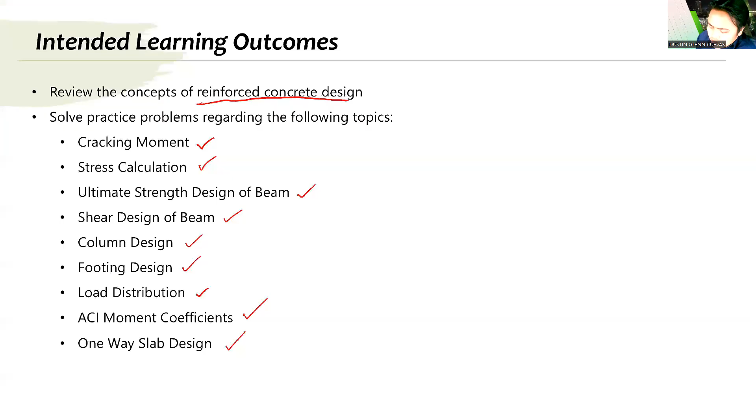Okay, so since this is just a review, let me go straight to ultimate strength design. This is what we reviewed last time. Anyway, I'm going to upload this lecture for those of you who are asking.

For ultimate strength design, basically, as I've said, this is just a summary of my lecture. So for ultimate strength design, we are now considering the maximum strength of our materials. That means in order for us to have safety, to have allowance, we can't just use the maximum of the materials. At the same time, you are not giving off any safety factors.

So our safety factor is actually coming from what we call load factors. The load factors are what give the safety. Load factors are actually our safety factor. We need safety because we are now maximizing the material when it comes to ultimate strength design. You maximize the strength of the material.

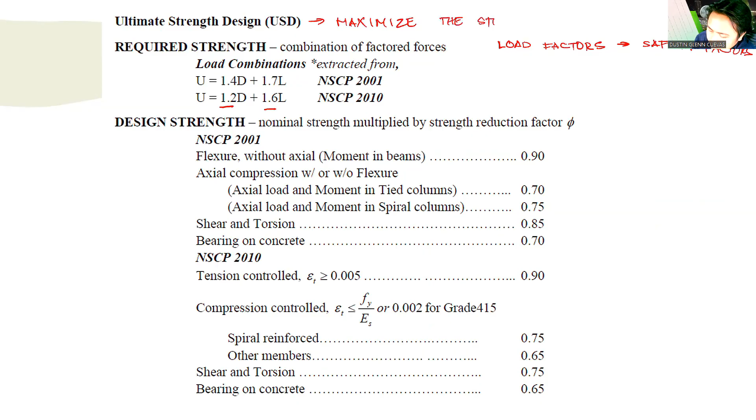So the common load factors that we use are actually 1.2 of dead load plus 1.6 of live load. That is for NSCP 2010. And for NSCP 2001, that is 1.4 of dead load plus 1.7 of live load.

You might be wondering, sir, why are you still teaching the 2001 code? Isn't that outdated? That is because our board examiner, Engineer Praxedis Marquez, started being the examiner for structural design since 2001, when that NSCP was being used. The question bank used by Ma'am Praxi, our examiner in structural design, has all her questions coming from 2001 going to 2010. So some questions can still only be answered using 2001. That is why in review center, we mention both codes, 2001 and 2010.

Anyway, if you know the concept, you don't have to worry about these codes. For 2001 NSCP, our load factor is actually 1.4 dead plus 1.7 live. For 2010 NSCP, it's actually 1.2 dead plus 1.6 live.

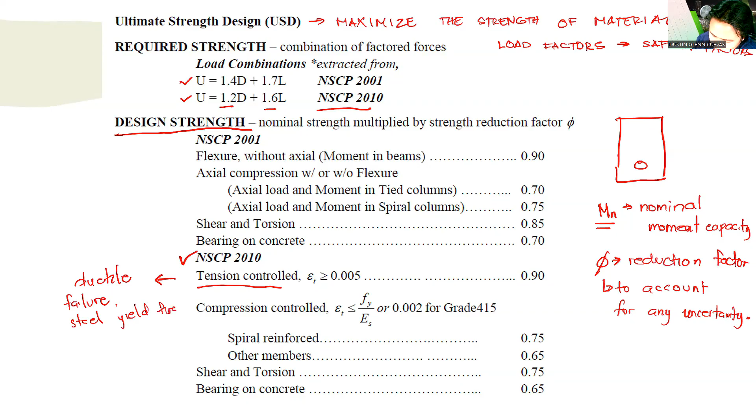So what is tension controlled? Basically, these are sections that are actually prone to ductile failure. So when we say tension controlled, these are sections which will exhibit ductile failure. When we say ductile, it means that the steel will yield. Steel yields first before concrete fails. So that's ductile failure, meaning steel yields first before concrete.

Steel yields first before concrete. So in NSCP 2010, we say that our section is tension controlled when the tension strain ET is greater than 0.005. If the tension strain is greater than 0.005, that is tension controlled. And tension controlled is actually what we want in our design, because we want the steel to yield, we want ductile failure. So our reduction factor, you can notice, is very close to 1, that is only 0.9.

On the other hand, when we have compression controlled, this is actually for brittle failure. So compression controlled, from the word itself, are sections that are commonly exposed to compression, for example our columns. In a column, the compression strain reaches 0.003 earlier compared to the steel reaching yield, because there is axial load involved.

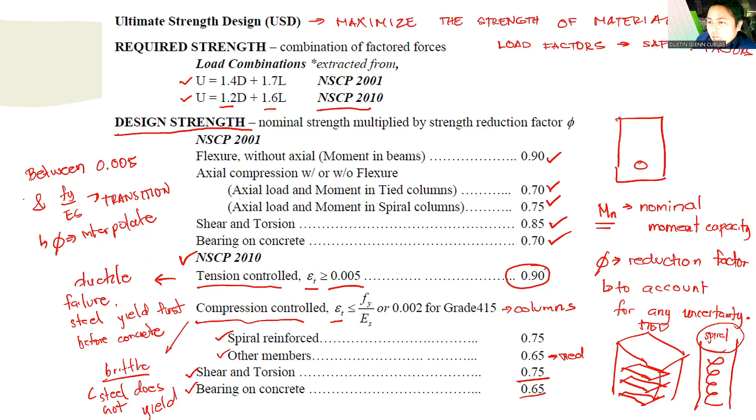Okay, so how do we calculate for the flexure formula? As I mentioned, we are going to use the maximum strength of our material. So if we have this compression, this is the compression, and basically the bottom part is actually in tension. We are experiencing positive moment, so compression and tension.

The bottom part of the reinforced concrete, yung bottom part na to, this one, basically it's already cracked na po yan, so it will not be included in the calculation. Crack na yung ilalim. And then you have tension being carried by the bottom or by the tension bars, so that is Fy, the stress is Fy.

And the stress in your concrete is highly nonlinear. Nonlinear po yung stress in concrete. This is nonlinear because concrete is a nonlinear material. So in order to make the calculation easier, we transform the nonlinear stress into its equivalent stress block. This is your equivalent stress block.

The equivalent stress block is actually 0.85 of Fc prime. So instead of using yung nonlinear na Fc prime, ang ginawa po natin, ginawa natin siyang equivalent stress block. Ginawa natin siyang rectangular lang, but we cannot use Fc prime kasi in-average lang po natin to eh, in order to get the equivalent rectangular block. So in-average natin yan, so we are only going to use 0.85 Fc prime. This is what we call the Whitney's stress block.

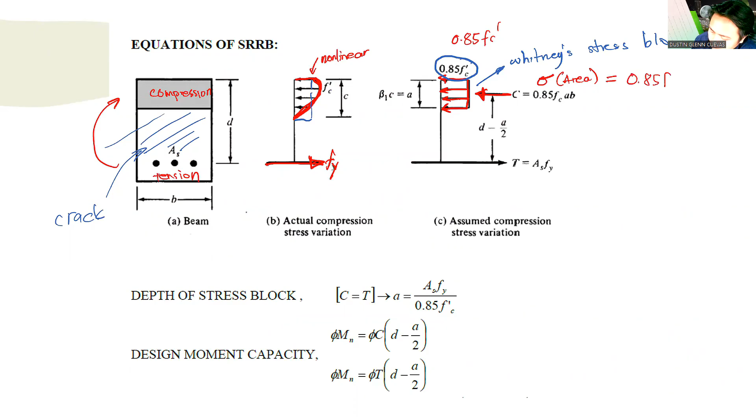So basically, if the stress is 0.85 Fc prime, and if you want to calculate for the compression force, it is stress times area. So based on our mechanics of materials, that is just stress multiplied by area, no? So the stress is basically equal to 0.85 Fc prime. The area is the area of the stress block - the area right here is A multiplied by B, AB.

This is B. The tension stress or the tension force is basically, again, the stress multiplied by area. The tension force is AS multiplied by Fy, given that Fy actually yields, kapag po nag-yield sa Fy. If hindi nag-yield, then we have to calculate the value of Fs.

So, in order to calculate for the depth of the stress block A, kailangan po natin calculate yung depth ng stress block A. The depth of the stress block A, we just have to equate compression is equal to tension. So equating compression is equal to tension, compression equals tension: 0.85 Fc prime AB is equal to the tension force, which is ASFY. You can now calculate for A - that is simple, let's just arrange the equation: A equals ASFY over 0.85 of Fc prime B.

So, and then in order to calculate for the moment capacity, since this is actually two forces that are equal to each other, and going opposite in direction, the other one is going compression, the other is going tension - two forces that are equal but opposite in direction, they are what we call a couple.

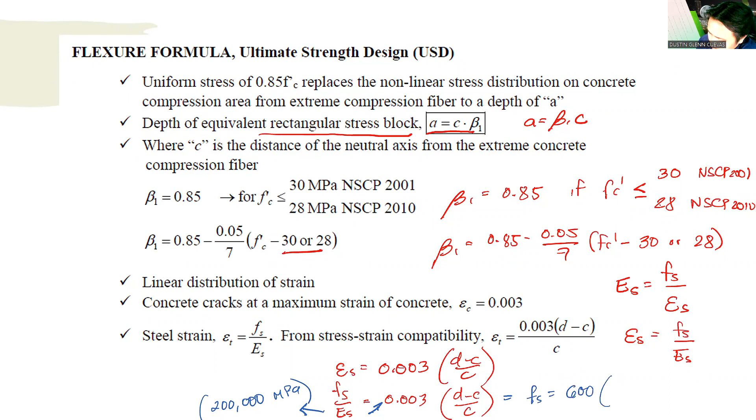You just have to cross multiply. So 200,000 multiplied by 0.003, it will just be Fs is equal to 600 multiplied by D minus C over C. Okay? So that is how you calculate for the stress in steel if you want to check kung nag-yield ba yung bakal mo o hindi.

Okay, if Fs is greater than Fy, that means your steel yields. If Fs is less than Fy, then not yield. Not yield, use Fs. Gagamitin po natin si Fs sa calculation.

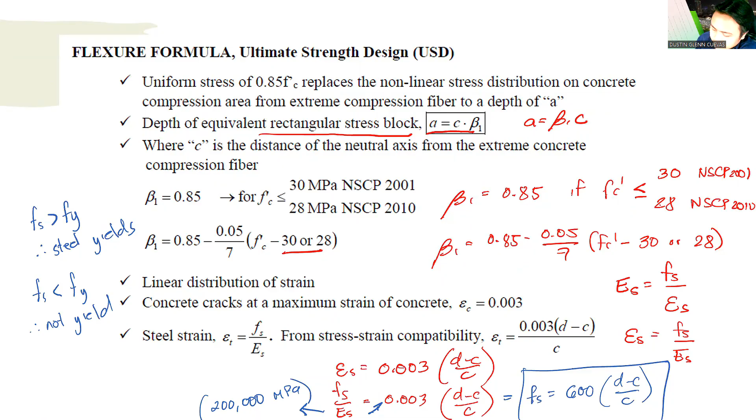So you don't have to remember any formula here, no? Because if you try to memorize the formula, one way or the other, makakalimutan mo rin siya, no? So try to remember compression is equal to tension. The compression is stress multiplied by area, and the stress is 0.85 FC prime. The area is A multiplied by B, and that will be equal to As Fy.

AS is the area, the stress is Fy. And then if you want to calculate for the capacity, that will just be the force multiplied by the distance. And the force is compression or tension, you can choose - either compression or tension, multiplied by the distance, which is D minus A over 2.

Then you have to multiply with the reduction factor to calculate for the ultimate capacity. In design offices, I would like to mention this because when I remember it from the board exam, it's actually quite helpful. In design offices, when you are creating a spreadsheet to calculate for the area of steel, usually what we are doing is to calculate the steel ratio.

So let's introduce again. There's actually what we call the steel ratio. Steel ratio is the ratio of the steel over the effective area of concrete. So steel ratio is rho, which is equal to AS divided by BD. So if I want to solve for AS, it is equal to rho BD. Rho is our steel ratio.

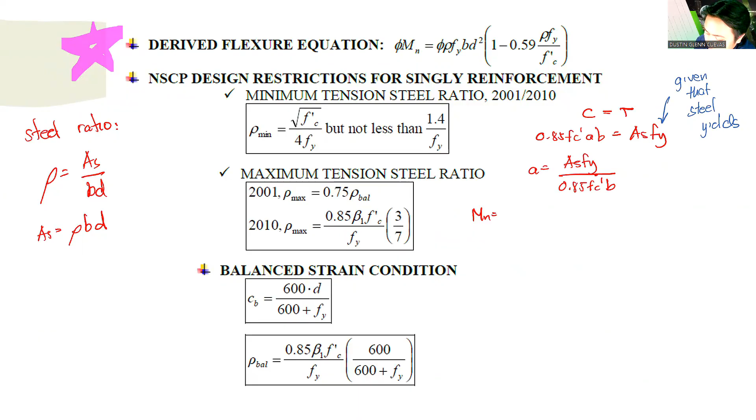Based on our formula of Mn, Mn is equal to compression or tension multiplied by D minus A over 2. And if I want to use compression, that is 0.85 of FC prime AB, D minus A over 2. Substituting this value of A to this equation, Mn will now be equal to 0.85 of FC prime, the A is ASFY over 0.85 FC prime B.

But let me do some changes here. Before I substitute, I will multiply this by D over D such that AS over B times D becomes equal to rho. So it will be equal to rho FYD divided by 0.85 of FC prime. That is my A - rho FYD divided by 0.85 of FC prime.

So that is what I will substitute to this equation. Substituting, that will be rho FYD divided by 0.85 of FC prime B multiplied by D minus rho FYD divided by 0.85 of FC prime. Take note, multiply by 2 because we have A over 2.

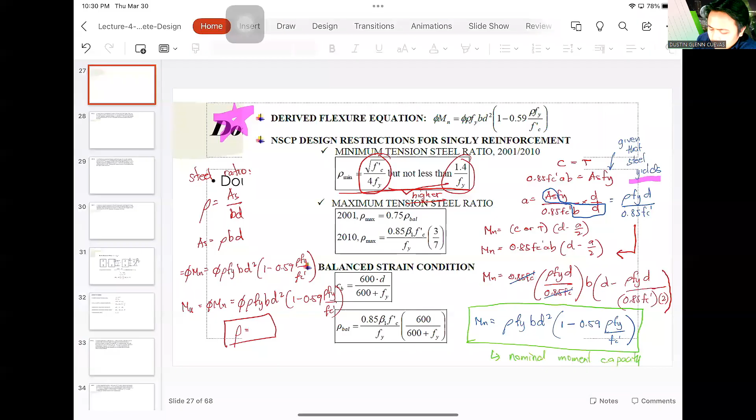multiply by 3 over 7. So what is that 3 over 7? Ano po yung 3 over 7 na yun? So according to NSCP 2010, I'm talking about NSCP 2010,

the minimum strain such that your beam will be considered flexural beam. According po ito sa NSCP 2010, no? According sa kanya, the minimum strain, ES na lang, ES minimum, the minimum strain is actually 0.004. The minimum strain in order for your beam to be considered as flexure dominated, or ibig sabihin po flexure yung failure niya na may moment. The minimum strain is 0.004. So strain po yan in terms of strain.

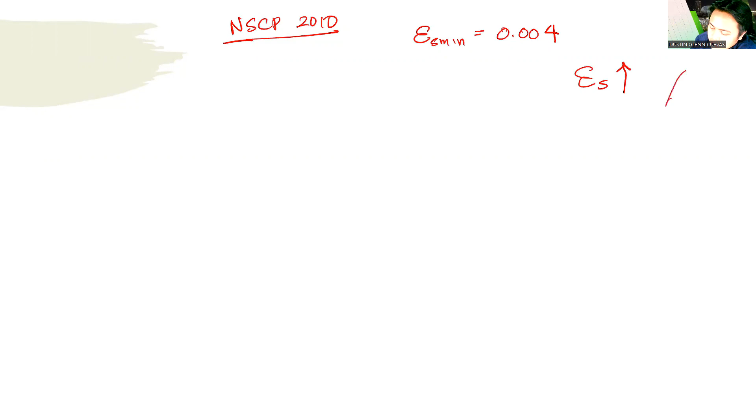However, as your strain increases, ang nangyayari po kapag lumalaki si strain, si rho bumababa. Si steel ratio, it's actually decreases. When the strain increases, the steel ratio decreases. And on the other hand, when the strain decreases, the rho increases. So they are actually inversely proportional.

Inversely proportional. So ang katumbas po ni minimum, dahil inversely sila, for minimum steel ratio, ang katapat niya po is actually the maximum steel ratio, rho max. Ang rho max daw natin, the maximum steel ratio is when the strain is 0.004. So when the strain is 0.004, this is the strain 0.004. The strain in concrete is given as 0.003.

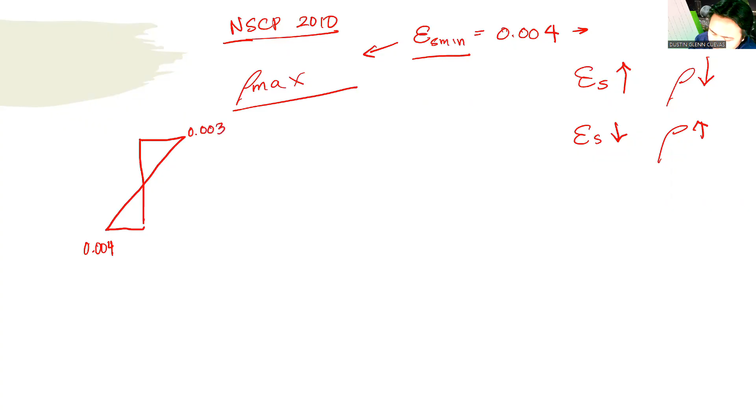So this is actually C, and this is D. So if I want to do ratio and proportion ulit ako, this is triangle 1, and this is triangle 2. So such that this one will be 0.004 plus 0.003, that is 0.007. So triangle 1 muna ako, that will be 0.003 divided by C is equal to triangle 2, which is 0.007 divided by D. So the ratio of C over D

is equal to 3 over 7, 0.003 divided by 0.007, or basically your C is equal to 3 over 7 of D, 3 over 7 of D. And if I want to relate that to A, pwede ko na ma-relate yan dun sa A.

C is equal to T. So C is 0.85 of FC prime, AB is equal to ASFY. And AS is equal to rho, or basically rho is equal to AS over BD.

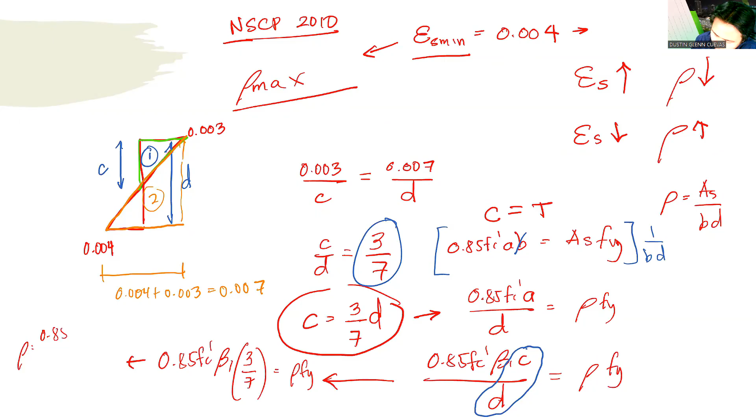So if I want to solve for rho, ang rho natin is equal to 0.85 FC prime beta 1 divided by Fy multiplied by 3/7. So ito yung maximum natin, no? That is our maximum steel ratio: 0.85 FC prime beta 1 over Fy multiplied by 3/7. So this is actually the maximum steel ratio for NSCP 2010.

Yan talaga yung sinabi ng Code. The strain is supposed to be 0.004 for your section to be considered as flexure dominated, no? Flexure dominated.

On the other hand, meron po tayong tinatawag na rho 5. Ano yung rho 5? So rho 5 is basically another amount of steel ratio. Ito pong rho 5, nagsasabi sa atin that if you use this amount of steel ratio, your beam will surely be tension controlled, no?

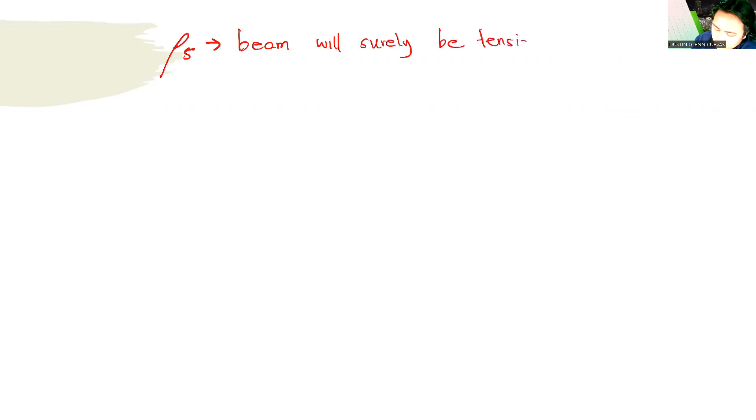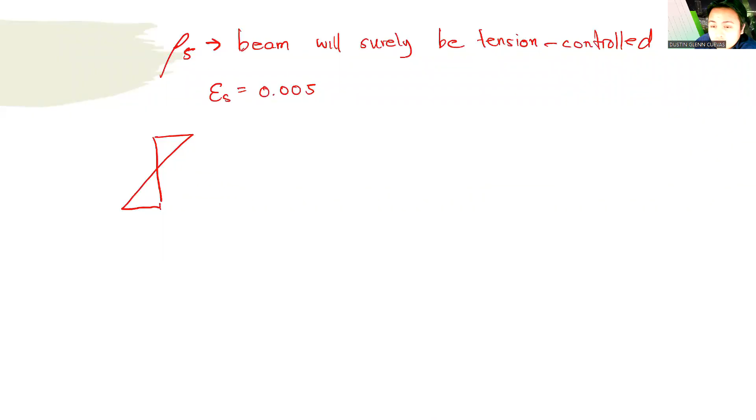Tension controlled. And according to what we read earlier, di ba sabi natin kapag tension controlled, the strain is actually equal to 0.005. So kapag yung strain natin 0.005, if we create again the strain diagram, this is 0.005, this is 0.003, so this is again C, this is D. So if I use the ratio and proportion, 0.003 over C is equal to 0.003 plus 0.005 divided by D.

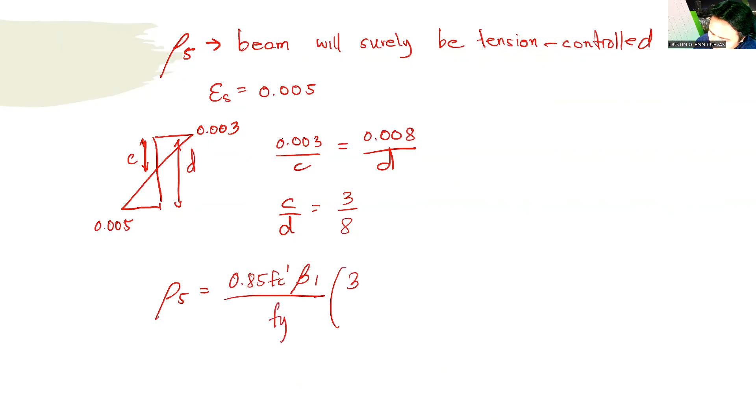So ang C over D natin will be 3/8, no? So substituting again to this equation, ang magiging equation natin for rho 5 is 0.85 FC prime beta 1 over Fy multiplied by 3/8. Take note, this steel ratio is actually for tension controlled condition. This is not the maximum steel ratio as given by the code. Ang maximum pa rin naman is 3/7.

However, for 3/8, that is for the amount of reinforcement given that your reinforcement will surely be tension controlled, no? This is actually the maximum amount of reinforcement given that your section will surely be tension controlled.

So kung sigurado kang tension controlled, ano yung phi factor? 0.9. The phi factor will be 0.9. Kasi kapag tension controlled, phi is 0.9. So again, the 3/8 is the maximum amount of reinforcement given that your section will surely be tension controlled, whereas the phi factor is 0.9.

Sir, bakit ba meron pang rho 5, meron pang rho max? In this case kasi, when we talk about rho max, even though the code mentioned that it is 0.004, ito pong 0.004, di ba less than 0.005 yan? Less than, so is this tension control? Yung maximum, tension control kaya to? Hindi, di ba? So this is not tension control.

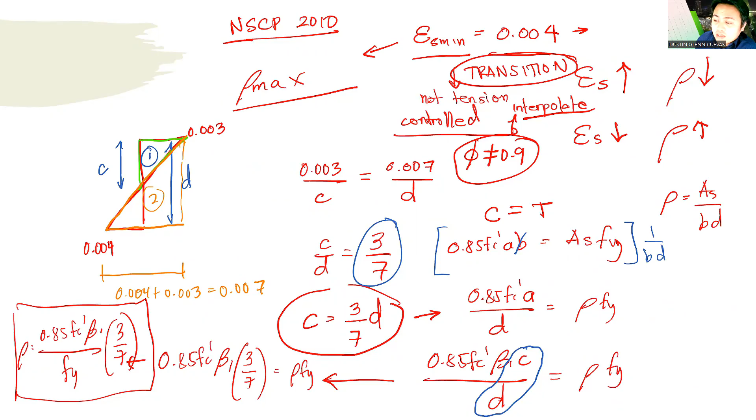Meron pa po tayong tinatawag na balance condition. Ano ibig sabihin ng balance condition? So aside from the maximum, meron kang rho 5, which is the steel ratio when your beam will surely be tension controlled, basically phi is 0.9. Meron pa po tayong tinatawag na rho balance. So rho balance is when the steel and concrete yield at the same time.

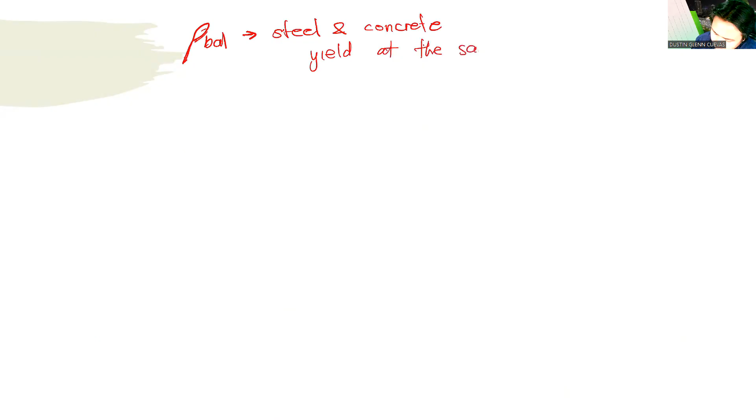So actually, this condition rarely happens - almost never does steel and concrete yield at the same time. Most of the time, according to our discussion last time, we prefer that steel yields first, because when steel yields, that is actually a ductile failure. So we want ductile failure.

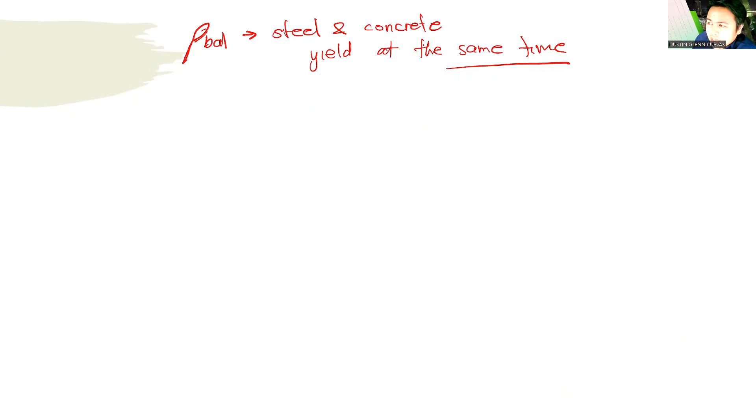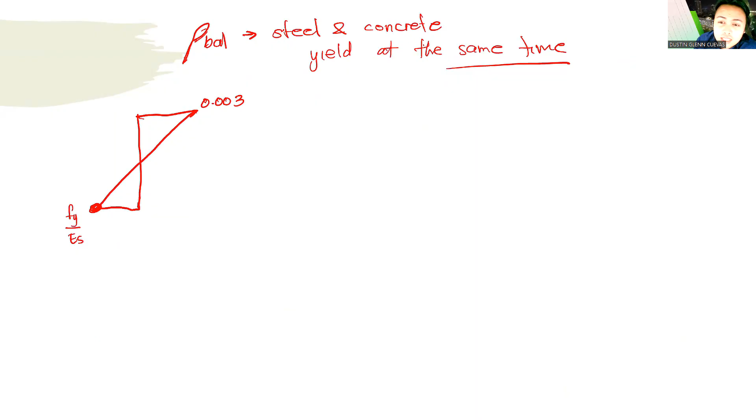Going back here, basically the balance is when the steel and concrete yield at the same time. So if we make our strain diagram linear, when it reaches 0.003, the steel yields, and this is actually equal to Fy over Es. Fy over Es - they yield at the same time. This is C, this is D.

So you can do a ratio: 0.003 divided by C is equal to Fy over Es divided by D minus C.

We could now substitute this to our equation earlier. The equation we have is 0.85 Fc prime beta 1 C over D is equal to rho Fy. So I want to calculate the ratio of C over D.

So to make it easier, let's consider the second triangle, just like earlier. This is triangle 2. So that will be 0.003 divided by C is equal to 0.003 plus Fy over Es, divided by D. So calculating for C over D.

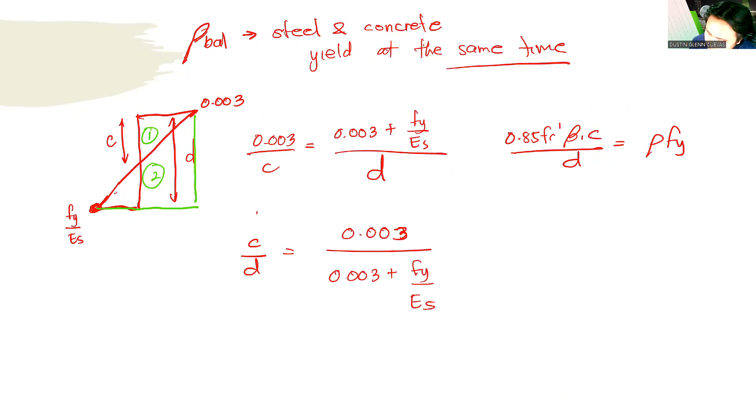Cross multiply: that will be 0.003 divided by 0.003 plus Fy over Es. And Es is given as 200,000 megapascal. So multiply by 200,000: C over D is equal to 200,000 times 0.003, that is 600, plus Fy, over 200,000. Simplify, that is C over D is equal to 600 over 600 plus Fy.

So substituting that to this equation, the rho, or the rho balance, is equal to 0.85 Fc prime beta 1 over Fy multiplied by 600 over 600 plus Fy. You could try to remember this formula - it's only applicable for balance. That is what we call the balance steel ratio, when the steel and concrete yield at the same time.

Again, you have to remember three rho values. First one, maximum, when the strain is 0.004, the factor is 3 over 7. Second one, when the beam is surely in tension, that is when the strain is 0.005, the factor is 3 over 8. Third one, balance, when the steel and concrete yield at the same time, the factor is 600 over 600 plus Fy.

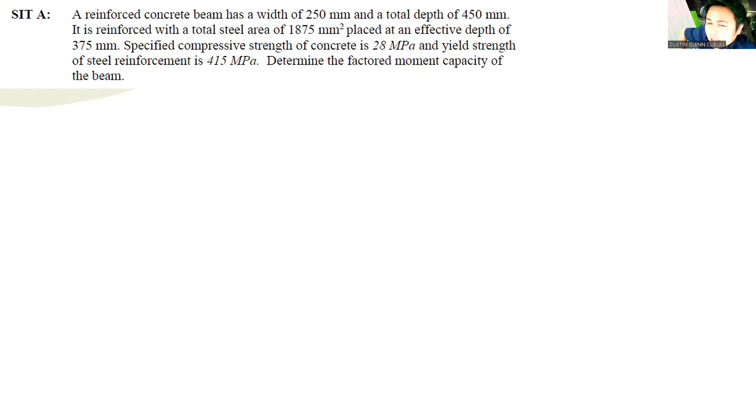You need to listen from the start. You need to absorb the concept so that you won't forget all the formulas. Even I can derive it all the time - I'm able to derive it all the time.

So let's calculate this one. A reinforced concrete beam has a width of 250 millimeters and a total depth of 450.

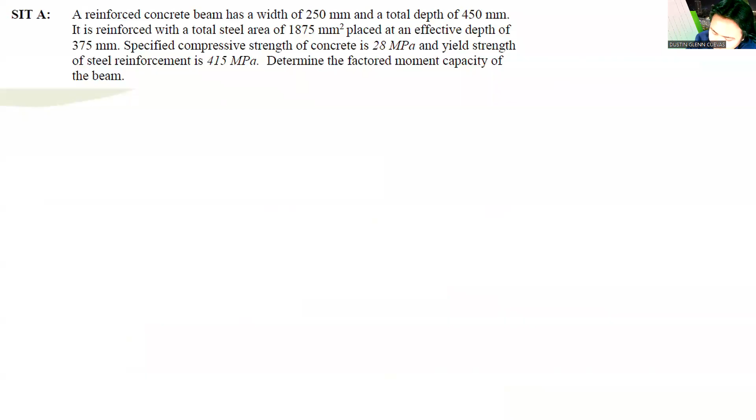So the width is 250 and the total depth is 450. It is reinforced with a total steel area of 1875 millimeters squared, placed at an effective depth of 375. Specified compressive strength Fc prime is 28 megapascal, and Fy is 415 megapascal. Determine the factored moment capacity of the beam.

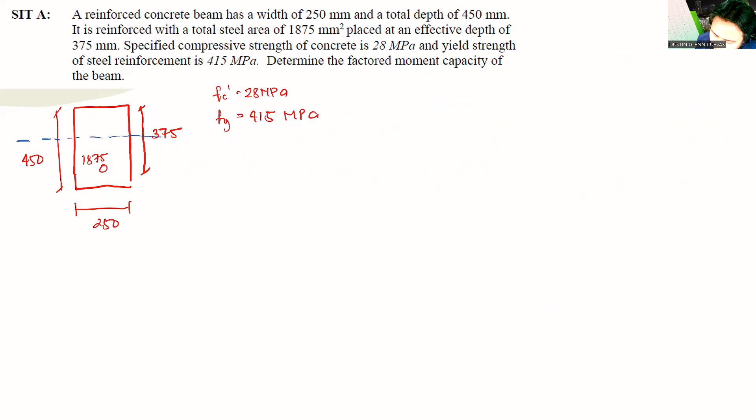What will happen is the beam will crack, and then you will have a rectangular stress block. The rectangular stress block is 0.85 Fc prime stress, and then you have the tension side.

So you just have to equate compression equal to tension. The compression is stress multiplied by area. Stress is 0.85 Fc prime, and your area is A multiplied by B. That is equal to As Fy, assuming steel yields. I'm assuming first that steel yields; later on, we will check.

So calculating for the value of A: 0.85 times Fc prime times A times B, that is 250, is equal to As, that is 1875, multiplied by Fy, 415. The value of A will be 130.78.

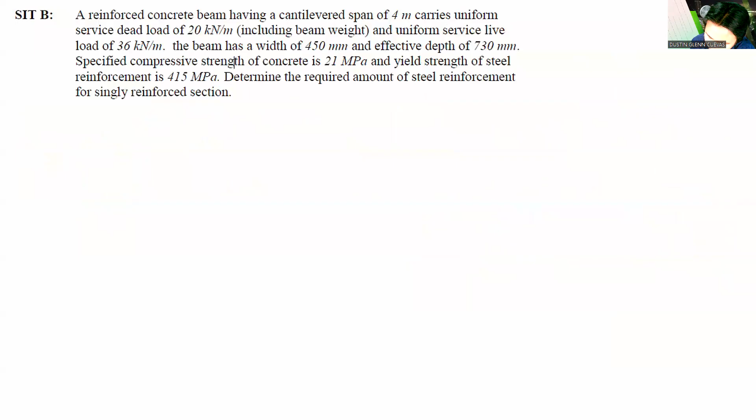Since steel yields, to calculate for the nominal moment capacity Mn, Mn is equal to compression or tension multiplied by D minus A over 2 - force times distance. I'll use tension since I know steel yields, so As Fy multiplied by D minus A over 2. That equals 1875 multiplied by Fy, 415, multiplied by D, effective depth 375, minus A, 130.78, over 2.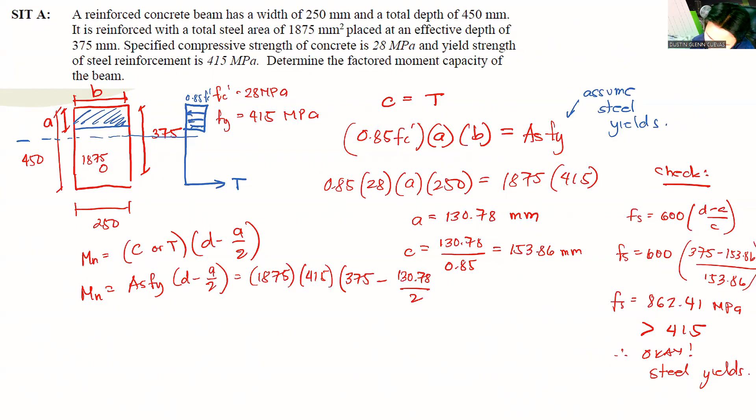So Mn is now equal to 240.92. Divided by 1,000 to make it kilonewton meter - for those watching the recording, in case you're confused, this was divided by 1 times 10 raised to 6, since we're in newton millimeter, divided by 10 raised to 6.

So to calculate for the factored moment, take note the question asks for factored - phi Mn. Our phi factor or reduction factor is actually dependent on the strain. So if you calculate for the strain Es, the strain is 0.003 times D minus C over C.

So this is easy to calculate: 0.003 times, that is 375 minus 153.86, over 153.86. The strain will surely be less than 0.005, correct? What is the strain? 0.003 multiplied by D minus C, that is 375 minus 153.86.

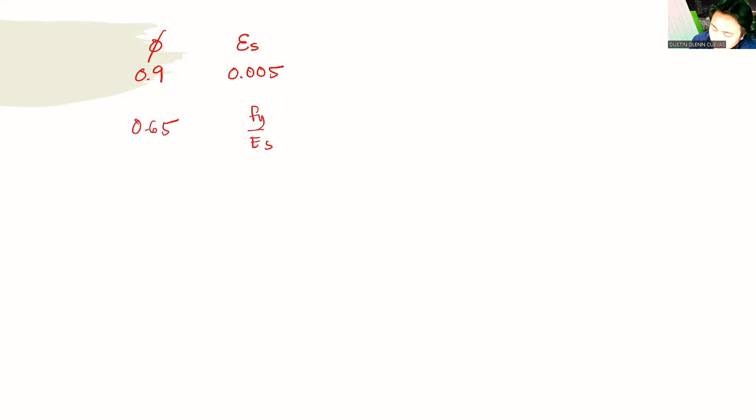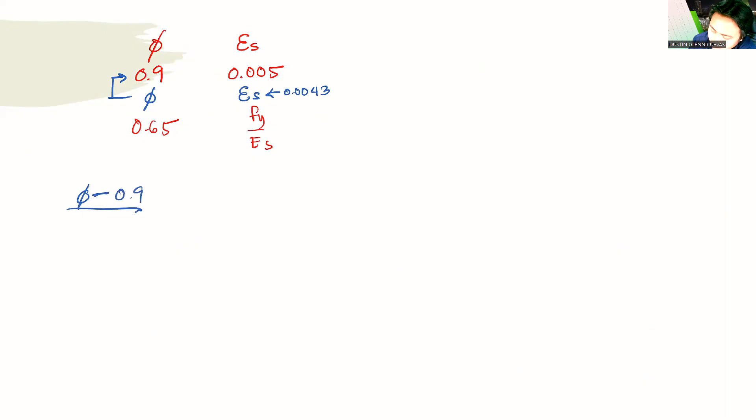So given that your strain is 0.0043 - that's the blue value here - you have to calculate for the phi factor. You can use your calculator for linear interpolation. Let's interpolate first before using the calculator: phi minus 0.9 divided by, equals 0.65 minus 0.9.

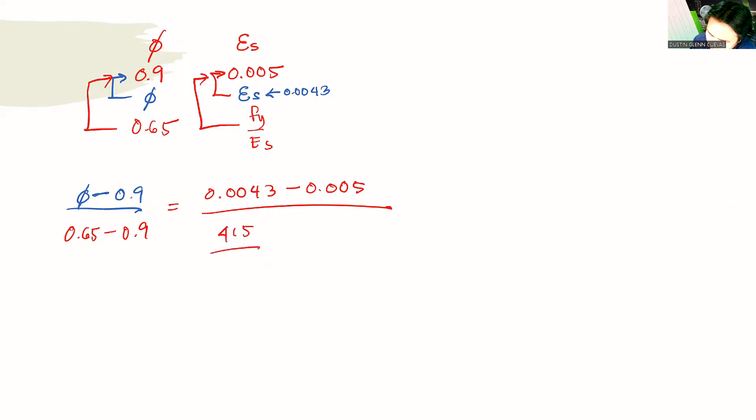That is equal to this one, 0.0043. 0.0043 minus 0.005 divided by Fy over Es. So Fy is 415. 415 over 200,000 minus 0.005. So all of this, the only unknown here is the phi factor. You can easily calculate for the phi factor. 415 over 200,000 minus 0.005. What is the phi factor?

0.84. So other formulas, this is actually the first solution, solution 1. Solution 2, you can use the formula given in the code, which is basically coming from interpolation itself, just from interpolation.

The phi factor is equal to 0.9 minus 0.65. Let me derive this. Okay, it will be 0.65. So the formula in the code is actually 0.65 plus 0.25, that will be strain S minus strain Y over 0.005 minus strain Y.

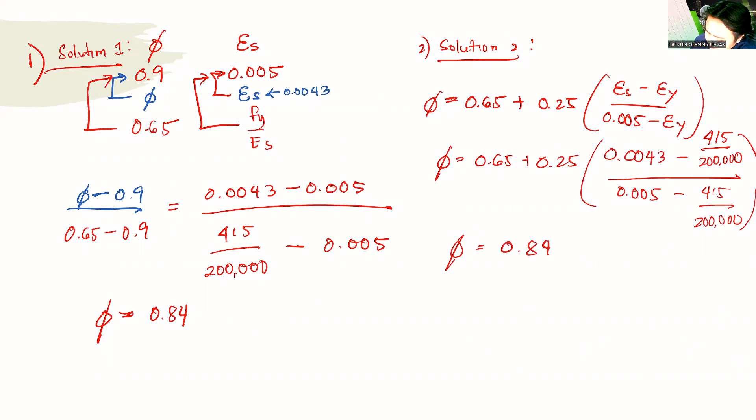0.84 again, of course, since it's coming from the same interpolation. 0.84 still because it just comes from interpolation. Basically, sometimes I forget that formula. Actually, right now I forgot it too because I don't want to memorize it. What I'm doing is just a simple interpolation. So you can also use your calculator if you want, since I'm also teaching calculator use. So solution 3, that will be using the calculator.

What we'll do on the calculator is mode 5.2 - mode, sorry, mode stat, mode 3.2. Can you see my calculator? Okay. So mode 3.2 first. Since this is just linear interpolation, at 0.9 my strain is 0.005.

At 0.65, my strain is Fy over Es. My Fy is basically 415 divided by 200,000. So 200,000. So I have 0.9 equal to 0.005, then 0.65 equals Fy over Es, 0.002075. So press AC. Again, please remember, what I put in X is actually the phi.

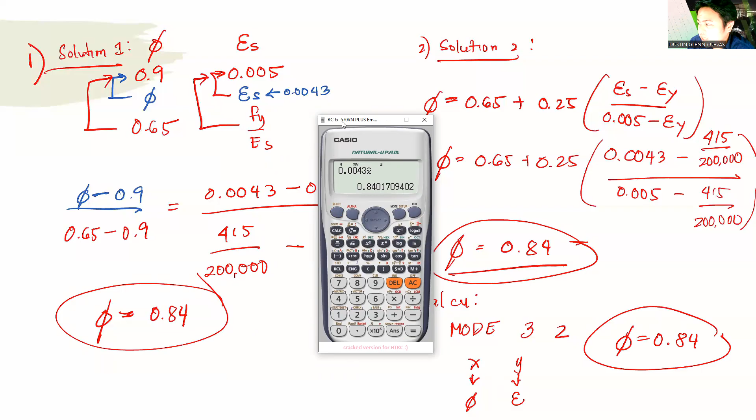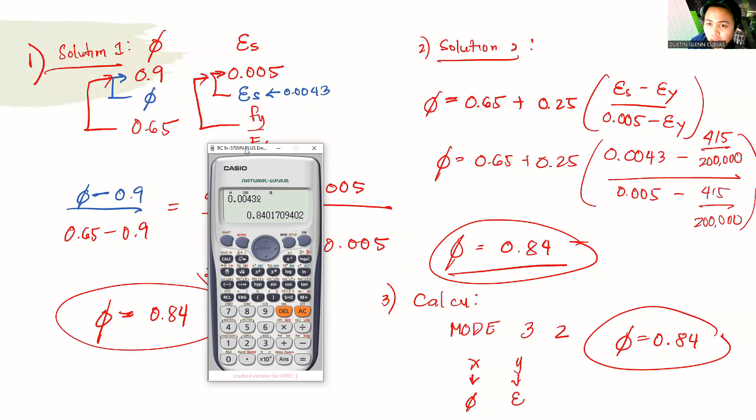So you have 3 solutions. If you forget any one of these, you can choose whichever you want to use. It could be the simple interpolation, it could be the solution coming from the code, or it could be the calculator. All will yield the same number - they're all the same.

So now that our phi factor is 0.84, I can now calculate for phi Mn. Mu is equal to phi Mn, that is 0.84 multiplied by 240.92. What is our Mu? Go, 202.37.

This is transition, okay, transition. Again, when it's transition, you have to interpolate. So interpolate - solution 1, you could do a simple interpolation if you forgot the formula. Solution 2, you could use the formula given in our code. Solution 3, you could use your calculator, mode 3.2. And to calculate for phi, you just input into your calculator the strain that you calculated, strain S, multiplied by X hat, and 0.84 will come out.

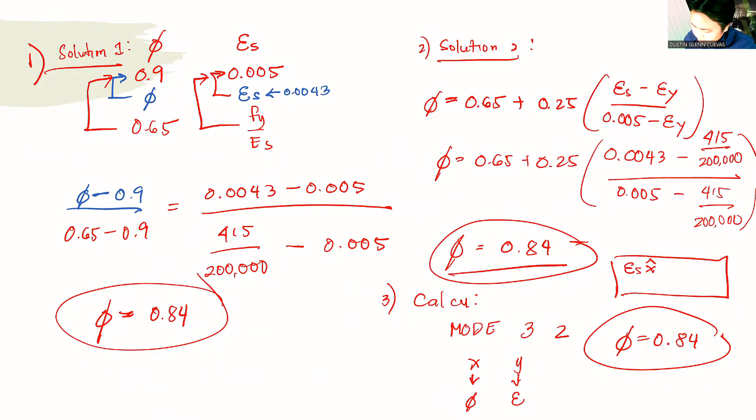Okay, so let's go to this problem. A reinforced concrete beam having a cantilevered span of 4 meters - so we have a cantilever span, this is 4 meters - carries a uniform service dead load of 20 kilonewton meter.

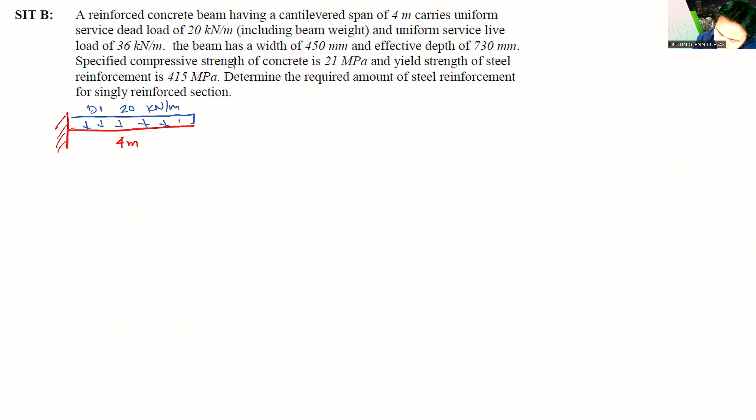Dead load, including the beam weight, take note, including the beam weight, and the uniform service live load of 36 kilonewton meter. So live load is 36 kilonewton meter.

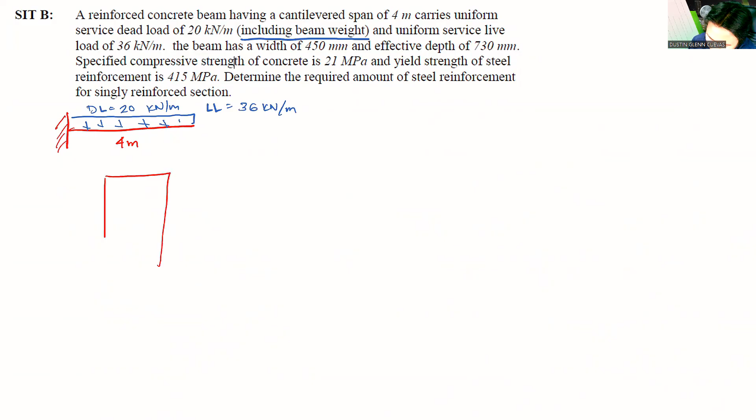The beam has a width of 450 and effective depth of 730. So the section is: the width is 450 and the effective depth is 730. Specified compressive strength is as follows: 21 megapascal, and 415 megapascal for steel. Calculate the required amount of reinforcement.

Actually, my drawing is incorrect because our beam is actually a cantilever beam. So for a cantilever beam, the compression is actually at the bottom and the tension is at the top. So it's reversed, let's reverse it para hindi kayo malito. So the tension is at the top because it's cantilever. Cantilever, negative moment. So tension is at the top, compression at the bottom.

So the effective depth is given as 730. So the ultimate uniform load is given as 1.2 dead load plus 1.6 live load. The one I'm using for now is 2010 NSCP. So 1.2 dead load, that is 20, plus 1.6 of live load, that is 36. What is our uniform load? Anyway, in your quizzes, in your exams, in the board exam, even in the board exam,

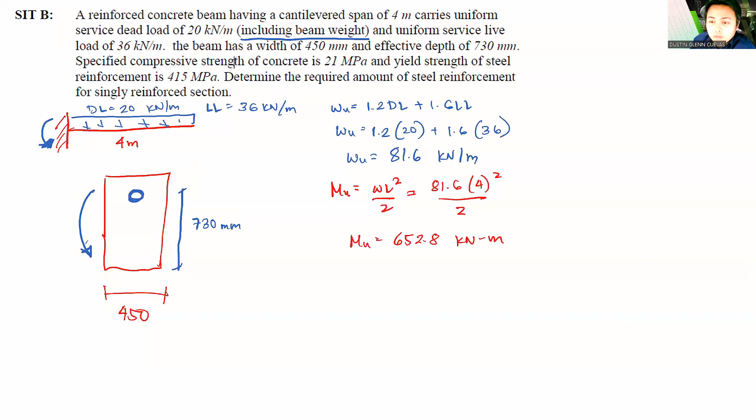652.8. So I will equate compression to tension. So we have compression, this is the tension, and this is the compression. Let's say this is the compression. So this is the depth A. So compression is equal to tension. Compression is 0.85 of FC prime, AB is equal to ASFY.

Okay, I cannot calculate anything from here. What you'll notice is, last time, usually we start the calculation from compression is equal to tension. That is true if you're not designing. If you know the amount of reinforcement, you could start the calculation here, compression is equal to tension, you can start there because you know AS. But if you don't know AS, there are two unknowns here, you don't know A, you don't know AS.

So you can't start there. Again, if you don't know the amount of steel reinforcement, that means you're designing the amount. You don't know A, you don't know AS, you can't start at compression is equal to tension. You have to start at the moment equation.

So our moment equation, which is MU, that is equal to phi MN, that is equal to phi. MN is compression or tension multiplied by D minus A over 2. So start here.

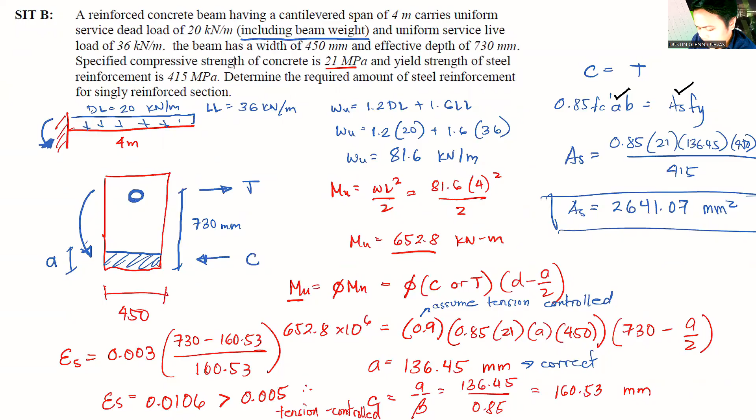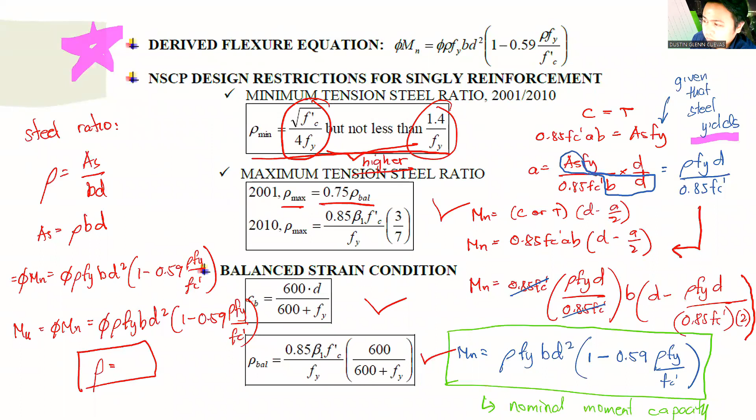So for Ro min, as I said earlier, that is basically the maximum between the two: 0.20... square root 0.25, 1/4 - that's what I recall - or basically square root of FC prime over 4 Fy, or 0.25 of square root of FC prime, or 1.4 over Fy. Again, minimum is the maximum between the two.

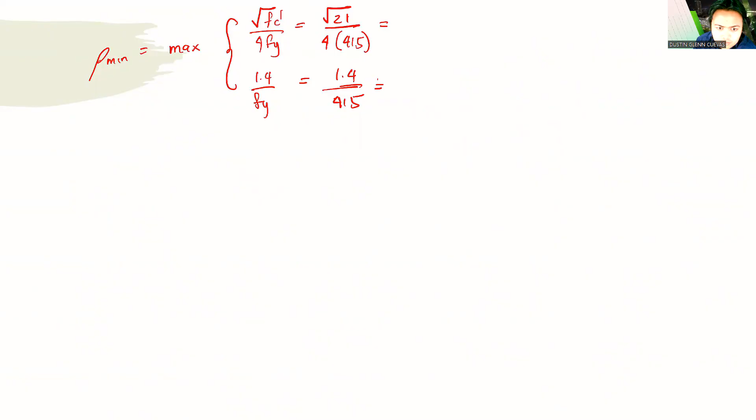That is the square root of 21 divided by 4 multiplied by Fy. Fy is 415. And then this is 1.4 over 415. What's the first part, the upper one? Four times 415 gives 0.00276. How about 1.4 over 415? That's 0.00337.

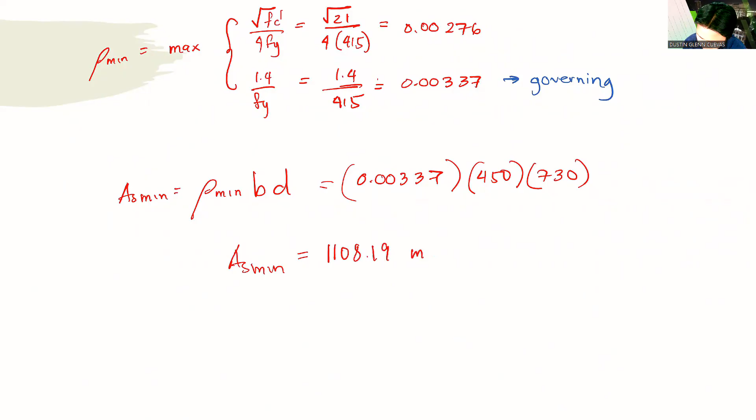Since this is the larger value, this will be the governing one. So since that is the governing value, your AS minimum is equal to Ro min times BD. Ro min is 0.00337, B is 450, D is 730. So what is our AS minimum? AS minimum is 1108.19. So minimum reinforcement is 1108.

Anyway, what happens if your AS is greater than Ro max? That doesn't mean you use Ro max - you won't use Ro max. What you do is you need to design using doubly reinforced design, DRB, doubly reinforced beam. So what you do is design as DRB when Rho is greater than Rho max.

So take note, let's write this down so it's clear: if Rho is greater than Rho min, use Rho. But if Rho is less than Rho min, then use Rho min. But if Rho is greater than Rho max, then design as DRB - don't use Rho max. Design as doubly reinforced beam when your Rho is greater than Rho max.

And let's say, for example, a diameter of the bar is given - let's say use diameter of the bar to be 20 millimeters. So how many 20 millimeter bars? When asked how many, for example, we have AS calculated, AS is actually equal to 2641.07.

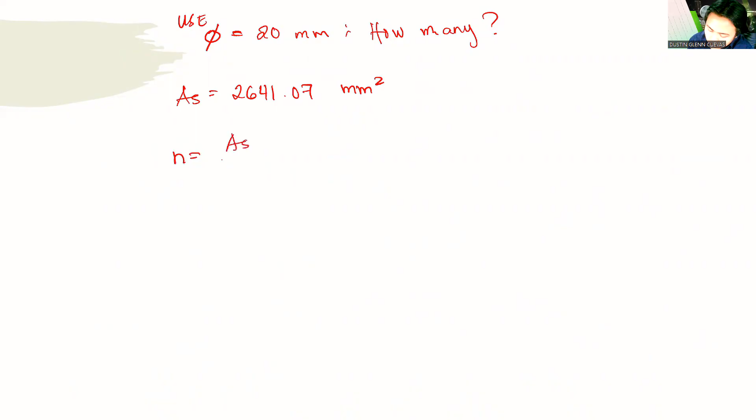2641.07 millimeters squared. So to calculate for the number of bars, that will be N equals AS divided by area of the bar - the area of one bar. 2641.07 divided by the area of one bar, pi over 4 times 20 squared. How many is that? How many bars? 8.4. So with 8.4, we don't round down when it comes to rebar - we round up. So say 9 bars.

Let's try to answer this problem.

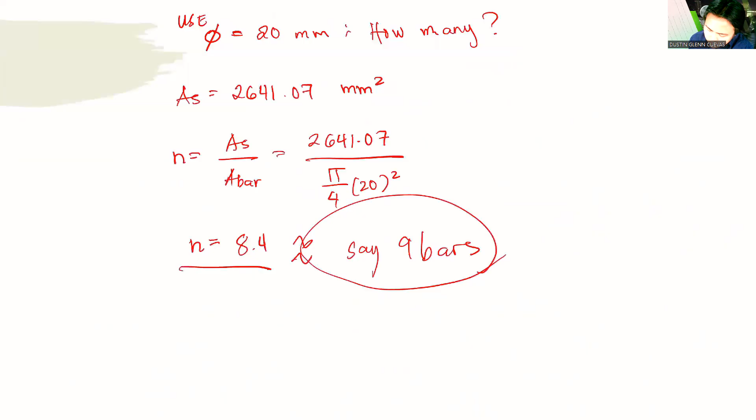A reinforced beam has a width of 250 and a total depth of 450, carries an ultimate moment of 203 kilonewton meter, with an effective depth of 375, specified compressive strength of 28, and a yield strength of 415. Determine the required steel area.

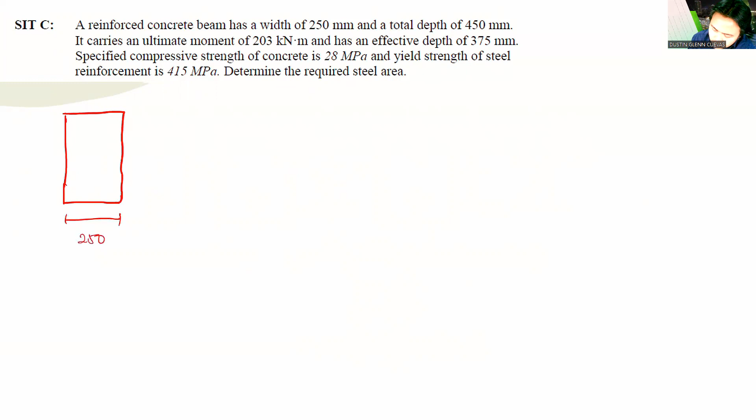So let's try to calculate. You have this one, width is 250, ultimate moment is 203, effective depth is 375, FC prime is 28, Fy is 415, and Mu is 203 kilonewton meter. So again, you already know what to do here. Let's start with the moment equation.

Start with the moment equation: Mu equals phi times compression times (d minus a over 2). So Mu equals 203 times 10 raised to 6, equals phi, assuming tension control, that is 0.9. Compression is 0.85 of Fc prime. Fc prime is 28, times A multiplied by B, which is 250, times effective depth 375 minus A over 2.

So I can now calculate for A. Again, this is just an assumption, assuming tension control. What's the value of A? The value of A will be 120.43.

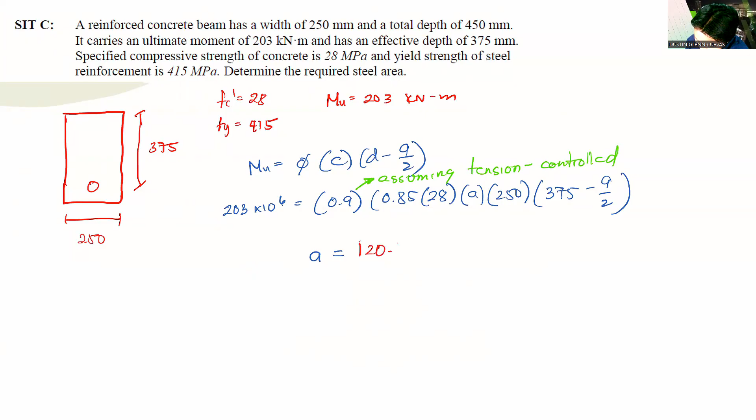120.43. Again, calculating for the value of C, that will be 120.43 divided by 0.85. C will be 141.68.

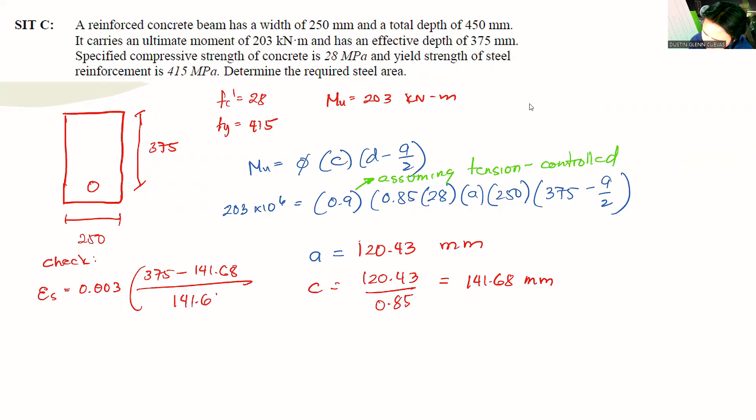Then calculating, checking the assumption, that will be the phi factor, calculating the strain. Strain S equals 0.003 times (D minus C), which is 375 minus 141.68, divided by 141.68. What's the value of strain? The value of strain will be 0.0049.

0.0049 is less than 0.005, so this was a bit tricky. This is actually not tension control, it's transition. Under transition, so we have to recalculate because it was a wrong assumption. We have to recalculate the capacity.

Recalculating the capacity: Mu is phi times compression times (D minus A over 2). So Mu is 203 times 10 raised to 6. Now I have to write phi in terms of C, which is in terms of A. Because it's transition, it's a bit more complicated. I have to write phi in terms of C, and this too I need to write in terms of C.

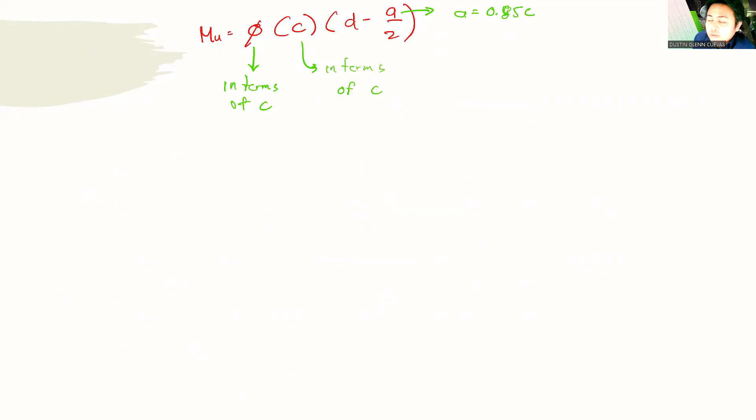For A, I can write A equals 0.85 C. And then I just have to solve for the value of C. Going back, we know that phi factor equals 0.65

plus 0.25 times strain S, strain S minus strain Y over 0.005 minus strain Y. So calculating for strain Y: Fy which is 415, 415 over 200,000, how much is that? 415 over 200,000 equals 0.002075.

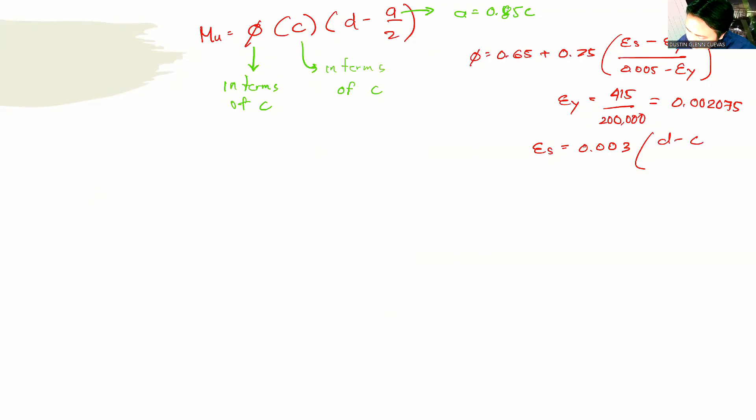0.002075. And then I can also write strain S in terms of 0.003 times (D minus C) over C. I'll write it in terms of C, so that is 0.003, effective depth 375 minus C, over C.

So I have to write phi, which is 0.65 plus 0.25, strain S is (375 minus C over C) minus 0.002075, divided by 0.005 minus 0.002075. So that is my phi factor, phi factor now in terms of C.

Substituting this, the equation gets a bit long. The phi factor in terms of C is 0.65 plus 0.25. Our Mu is 203, so substituting: 203 times 10 raised to 6 equals [0.65 plus 0.25 of (375 minus C over C) minus 0.002075, divided by 0.005 minus 0.002075].

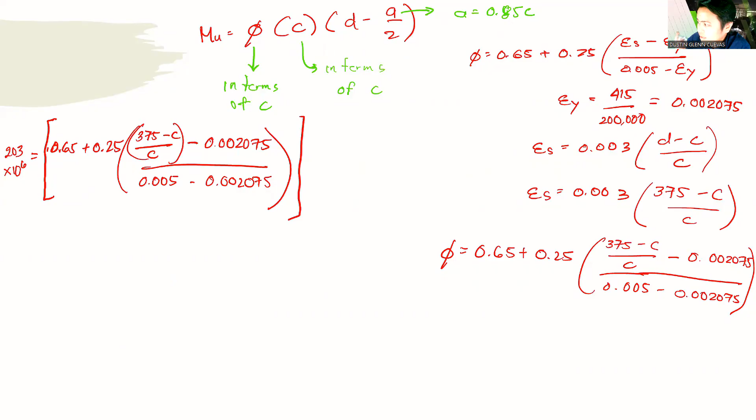That's just the phi factor so far: 0.65 plus 0.25 times (375 minus C) over C. So phi factor multiplied by C, that is 0.85 FC prime. The A I'll write as 0.85 of C. The FC prime, substituting directly, FC prime is 28. B is 250, so multiply by 250, multiply by (D minus A over 2). D is 375 minus 0.85 of C over 2.

So now you can solve for C. The only unknown here is C. Can it be solved? Anyway, what you do is simplify first: 0.85 times 28 times 0.85 times 250. So that gives 5057.5.

5057.5, 0.85 of 28 times 0.85 times 250. Let's simplify this so it's easier to type into the calculator. 203 times 10 raised to 6 is equal to 0.65 plus 0.25.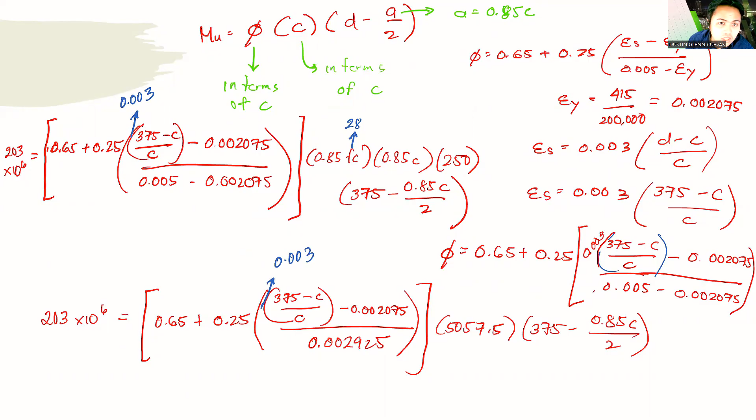I lost my multiplier of 0.003. Yeah, I lost the multiplier of 0.003. I still have a multiplier here of 0.003. I have a multiplier of 0.003. So, here too I have a multiplier of 0.003. That's long, huh? Multiplier of 0.003. I lost my multiplier of 0.003. So, that is 0.003.

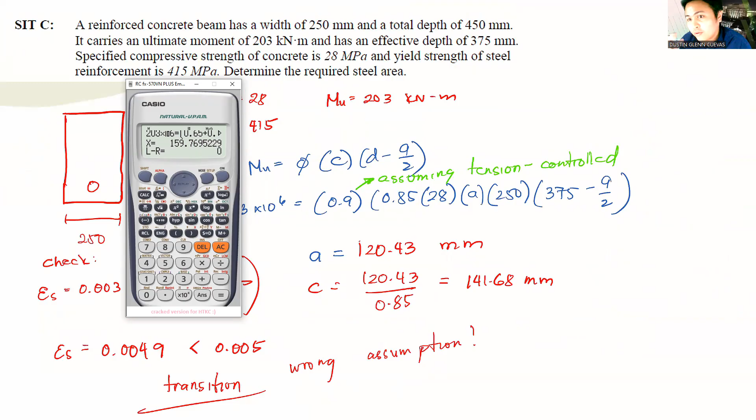How about you? I think 159 is correct because it's close to 141. Supposed to be close to 141. If you're thinking of an answer, it should be close to 141. So 159 is correct. How about you, Tristan?

Maybe you didn't put in the 0.003. There's a 0.003 there. Yeah, that is correct, 159.77.

If I want to solve for A, A is 0.85 of 159.77.

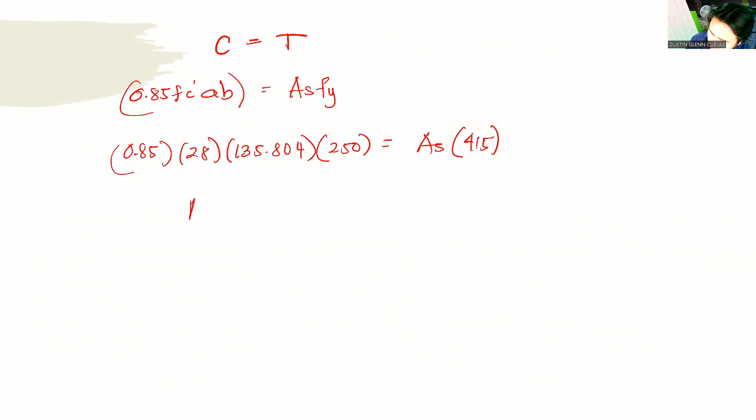Actually, this is surely yield. If you want, you could check whether the steel yielded. But basically, it did yield, right? So this is 1947.07.

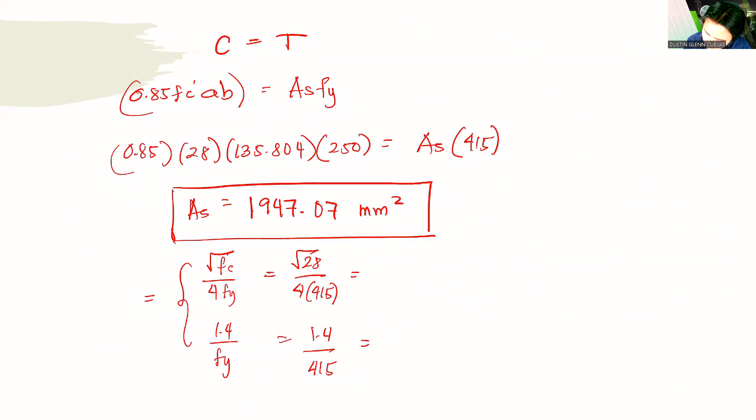1.4 over Fy. Square root of 28 over 4 times Fy, 415. This is 1.4 divided by 415. This is still rho min. What's the value of the upper part? Square root of 28.

Times 415. 318 or 319? And then the other one, 1.4 over 415, 0.00337.

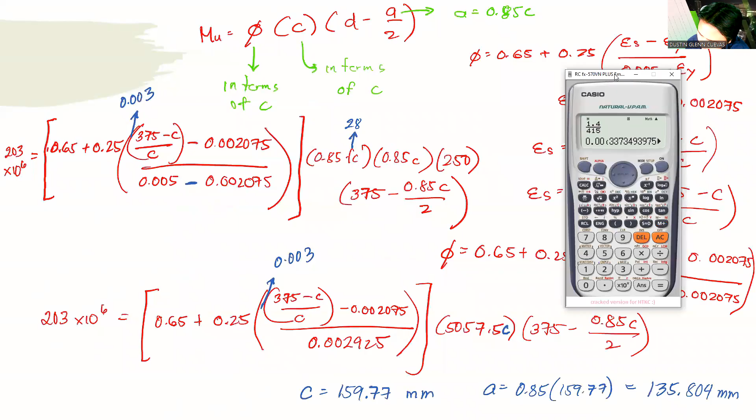So basically, this is still the governing one. So As min is now equal to 0.00337 multiplied by rho, BD. Ang B natin is 250 times 375. So As min is actually equal to 316.27.

You can also check for As max, since it's surely within the minimum. As max, that is equal to 0.85 Fc prime, beta over Fy. Fy is 415, multiplied by 3 over 7. What is As max? Multiply by BD, which is 250 multiplied by 375. What is As max? 1958, so almost malapit na, no?

1958.58. But still, As is between As min and As max. Kapag in between, ito pa rin po yung sagot, this is the governing one. That is the governing, since 1958 is the As max.

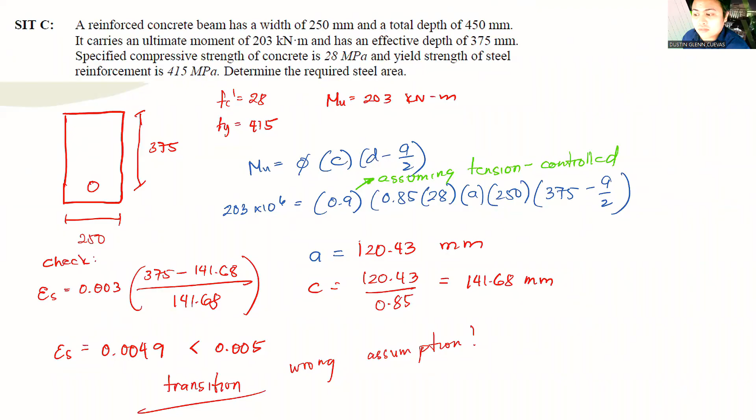Para mas madali, to simplify the problem. Kasi kung gagawin natin na 3/8, much easier yung magiging calculation. Any question about this problem?

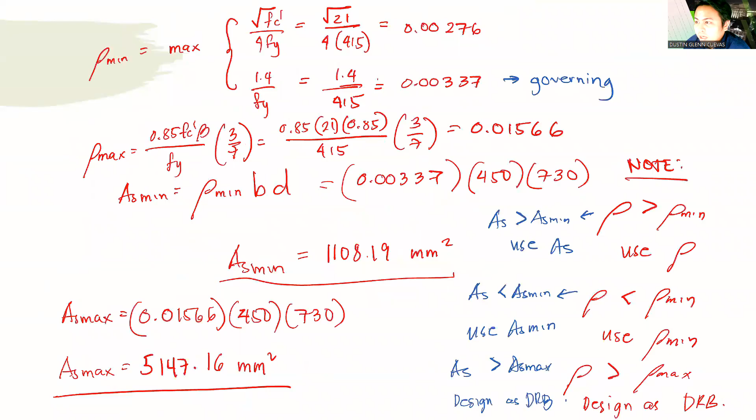Bakit po naging easier yung 3/8? Kasi kapag 3/8, kung ginawa mong rho max ay 3/8, sige, paliwanag pa natin.

Kapag ang ginawa mong rho max ay 3/8, this problem will be doubly reinforced. Kasi ang rho max mo, yung As max, for example yung As max, magiging smaller value. So if you want to calculate, yung As max mo magiging 0.85 times 28 multiplied by 0.85 divided by 415, multiplied by 3/8, multiplied by 250 times 375. Ano yung As max? Much lower, right?

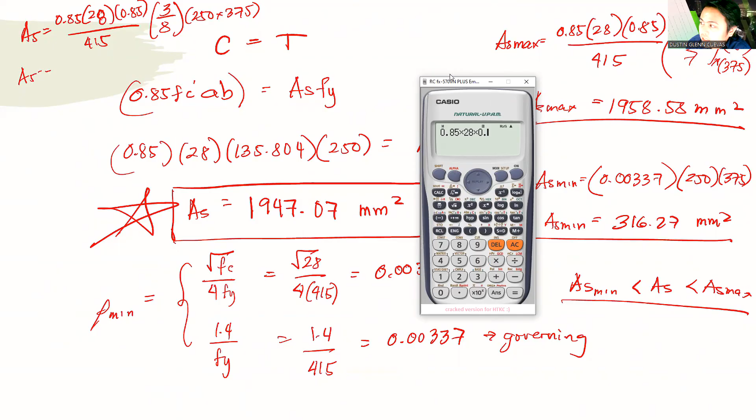This will be much lower, 1,713.76. So ibig sabihin, kung yung Asmax ko ay 1,713.76, magiging itong doble reinforced design. Tama? Kasi ang AS ko is greater than Asmax. Ang gagawin ko, kung gagawin ko talaga yung Asmax, which is yung when the strain is 0.005, kung yan yung gagawin kong maximum area ng steel, magiging itong doble reinforced.

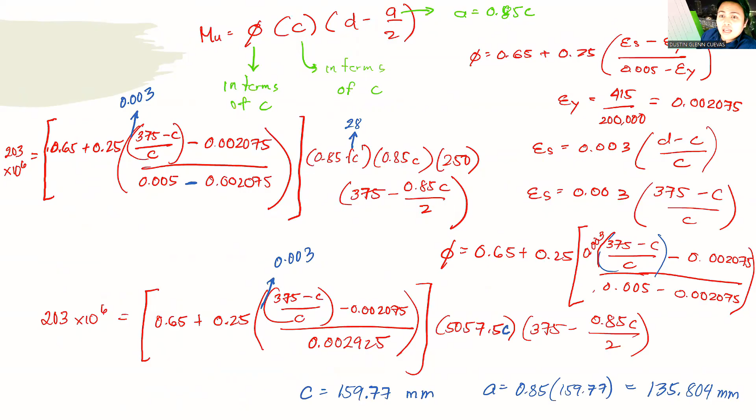Magiging doble reinforced, and we are going to talk about that here. So magiging siyang doble reinforced. But basically, if we are going to follow the code, this problem, you can design it as singly reinforced. Pwede mo siyang i-design as singly reinforced, just like what we did. Ito pong ginawa natin, na-design natin siya as singly reinforced, singly reinforced lang, using the transition zone, if we are going to follow the code.

Anyway, pag-usapan po natin yung double reinforced sa next discussion since I don't want to continue anymore, no? This will be part 2, so part 3 will start with doubly reinforced beam.